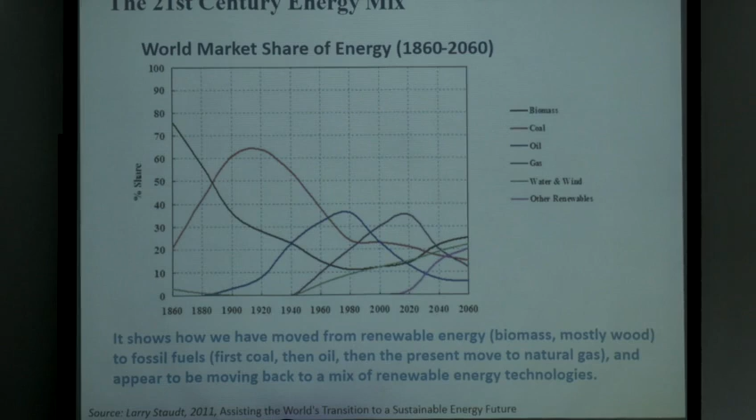But I think the more interesting part is really the projection, which will say that we have to have a mix. And the important point is that if you look at how we use biomass, coal, oil, and gas, and so on, there is always some particle technology, some granular flow, some fluidization, something there which is going to be used. So I think that we are in a very good position really to make an input in this, and if nothing else, just to understand better some of these operations and how they can affect what we are actually doing.

Now, this is the big vision, and this is the work that I'm working on at the moment, starting the end of 2016 for 5 years. And the other thing which was also very nice to see on the booklet yesterday was this micro, meso, and macro, because I think that is exactly what I'm trying to do. I'm trying to do some mainly modeling at the multi-scale side of all the story.

But of course, you realize that sometimes you have to do also some experiments, and I will try to present to you some experimental work which we have started very recently actually, so I have just some preliminary results about that. This is the vision of my work, like I said, and this is also something else which I would like to point out.

What we wanted to do and what my proposal was about, this is actually money which comes from the Research Council in the UK. I was trying to develop a user-inspired theory, and that's why I think that the application is very relevant in this situation. Now, for the ones of you who live in the UK, you know this is a buzzword. If we use user-inspired theory, this is much more likely that we are going to get funded.

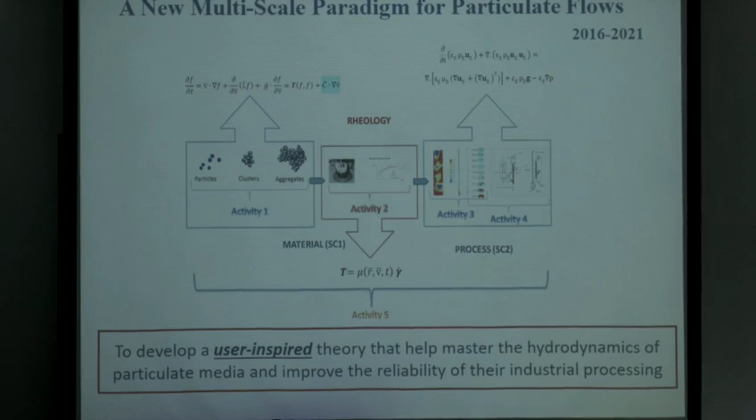Now, this is, like I said, it's a personal fellowship which aims just at looking at the micro, the macro, and the meso, of course, because we realized very soon that if we don't understand the meso scale, we are not able to do the work at the macro.

Now, this is what I listed as the deliverables, and really this is where I'm working at the moment: constitutive models and reliable measurements. And of course, there is the idea of also improving some CFD codes that we are using, and the translation, which is industry.

I don't want to preach here, but I think, speaking for my country - well I have two countries really - in one of them we really don't do enough to train the next generation. I think it's also extremely important that we don't always teach the same identical stuff. Most of my students don't know what meso is, and I think we have to start telling them that there is something in between that we need to understand.

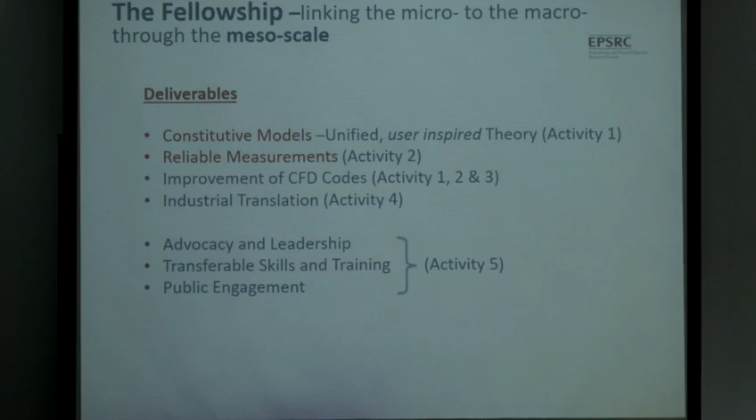Now, going back to the particle interactions, and that is what I'm going to concentrate mainly on today. In fact, I said I'm going to speak about wet particles.

We have the rapid flow regime, and I think that we have used, misused and overused the kinetic theory for this kind of flow.

We have the slow friction regime, and we know that we have been mainly modeling it through the Coulomb frictional law. However, there are so many situations where the intermediate regime develops, where you have coexistence of frictional and collisional stresses. That's where I really would like to understand better what's going on.

Honestly, I have to declare my ignorance. I don't know what is really physically happening there. I really would like to understand it a little bit better.

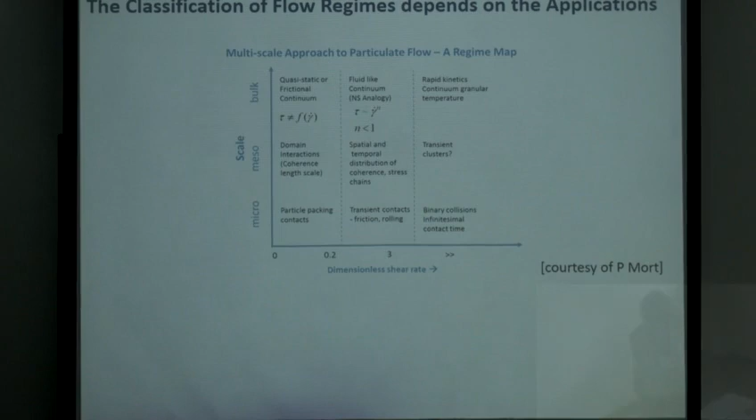This comes from Paul Mort, and I think that this diagram is extremely nice because it expresses a little bit what we know and what we don't know. And as you can see, there is not even...

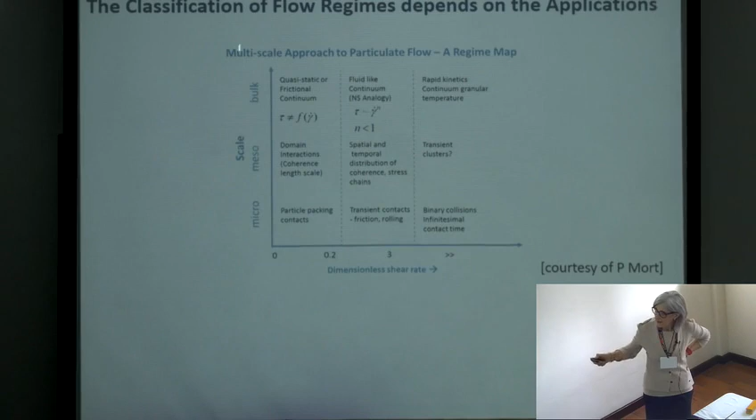There is not even numbers here, no units, nothing, because my colleagues in China are specialists about all this meso scale, and they have done excellent and good work in that area.

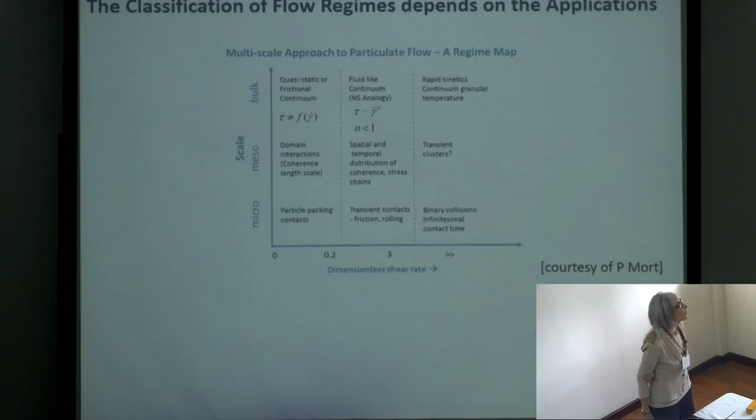And it depends on what is your observation. Meso, micro, or macro can really depend on what is your scale of observation. So I don't have anything there.

But for our system, we know in which area we are. Micro will be our particles, and meso will be just what is going on between the equipment - it's more like going from the micro to the bulk.

And the dimension is right there. We know how the stress behaves in the quasi-static regime, and we know the rapid kinetic continuum regime, but what's going on in the middle is not clear. I was convinced up to probably six months ago that there was a continuous curve there.

Just in May, I was at a very interesting workshop in China, organized by Professor Li, and I think that probably over there it's not a continuous link. There might be anything there.

It depends which effects take over. There are different effects playing, and it depends what takes over. So it depends also on the situation, what our flow conditions are, and so on.

And of course, we need to understand these bulk properties. Now, what do we know about the in-between? So meso is in-between - what do we know about in-between?

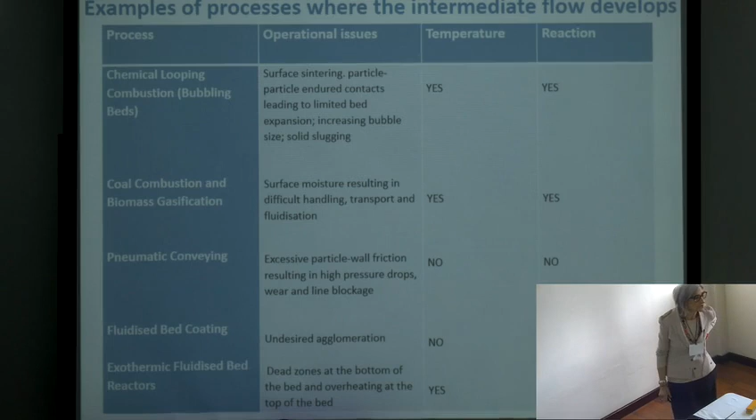We have chemical looping combustion, and for the people doing carbon capture, they know there is a lot of work going on in that area. There is coal combustion, biomass gasification, conveying, fluidized beds, and so on.

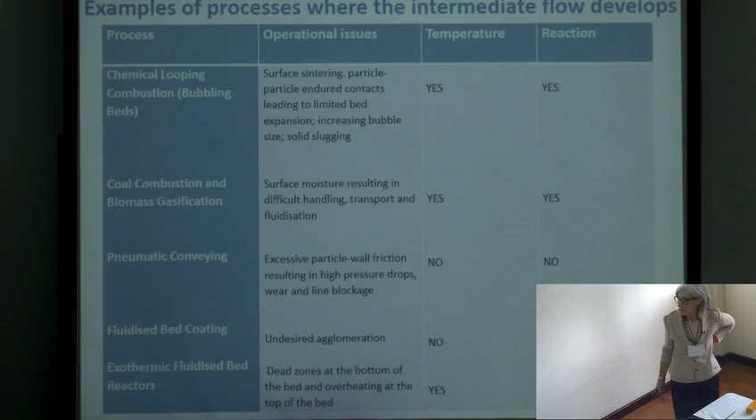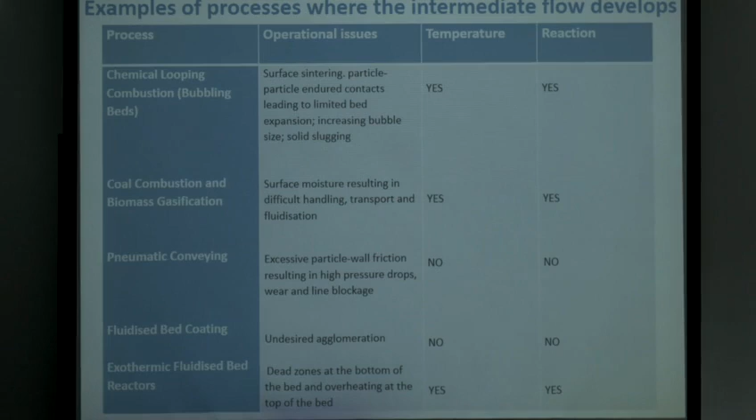Another thing I'd like to point out now, because I'm going to touch upon this later - let's also not forget that it's not just hydrodynamics. As you said yesterday, at some point we have to start thinking about the real situation and not just forget that it's only hydrodynamics. We have chemical reactions, we have heat transfer, so we have to account for that. That's why I was trying to look at this situation.

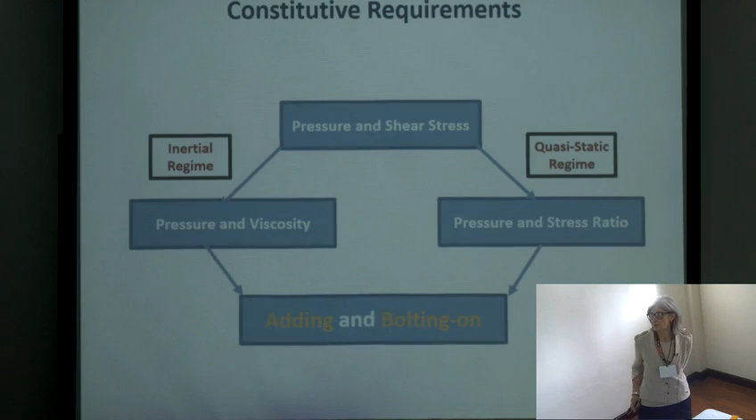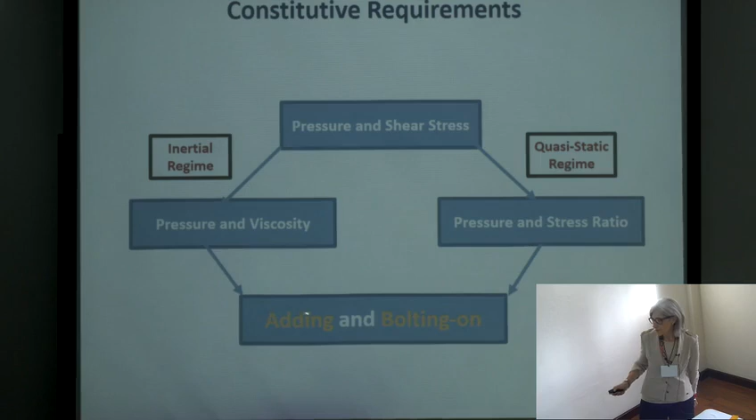Now, what are the constitutive requirements? If I want to develop constitutive equations, what are the constitutive requirements that I need to take care of? We start from here - we have the inertial regime, we have the quasi-static regime, and usually we look for the pressure and viscosity in the inertial regime, and the pressure and stress ratio in the quasi-static regime. I think that what we are doing here is, since I have an hour, a bit of a philosophical point, and I'll try to do a little bit of philosophy as well.

Yes, it's a philosophical point for me, and actually I don't have an answer, and I would like really that we discuss a little bit about this later, because this is an important point for me.

We do a lot of adding and what I call bolting on. Now, what do I mean by that? Adding, we know what it is. I'll show you some results. We have frictional stresses, we have kinetic stresses, one plus the other one, and that's the total stress.

So we add them. And the first thing that bothers me a lot is this on and off. Because if I have the on and off, I'm not able to do the intermediate regime. So that's the first thing that bothers me.

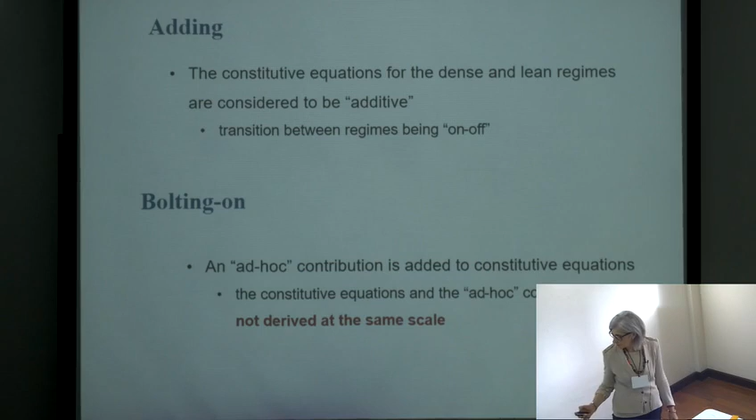The second thing is the bolting on. Now, look at the friction that we add. What do I mean by bolting on? I think the next one will explain better what I mean by bolting on.

This is a very used way of modeling granular materials. So there is an area where the flow is dilute, another one where it's more dense. And what we do, we add the

kinetic contribution to the stress with the Coulomb expression, right? I have a problem here, because we develop the stress in the kinetic theory in a very rigorous way by following the kinetic theory of gases.

And we do averaging integrals and this and that, and we get to the stress, right? Very complicated expression. And then at that point, we are not happy about what we have done. We don't predict what we want to predict. So what do? We bolt on another thing, which is at another scale.

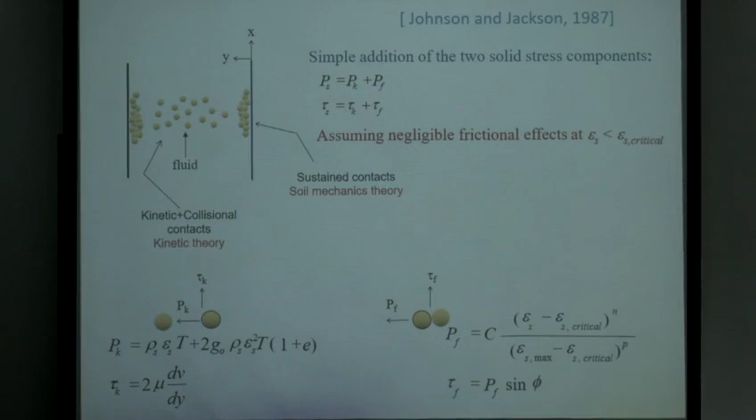So this one has not been developed at the same scale as this. So this bolting on, it might be fine, and if it predicts what I want to predict, of course, the models tell us what we want them to tell us. But the problem is that, systematically and philosophically, this makes me uneasy.

So this is the first point that I said, and we are doing a lot of adding and bolting on here, adding the two terms and bolting on another thing.

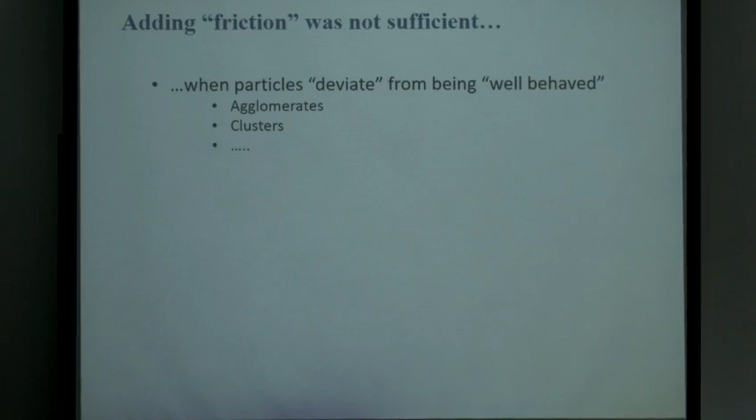However, we soon realized that friction is not sufficient. And in fact, agglomerates - and people, in dense situations, sometimes call them streamers. You call them as you want, it's semantic at the end. But clearly, you cannot predict agglomerates. And if this happens, you start to have problems.

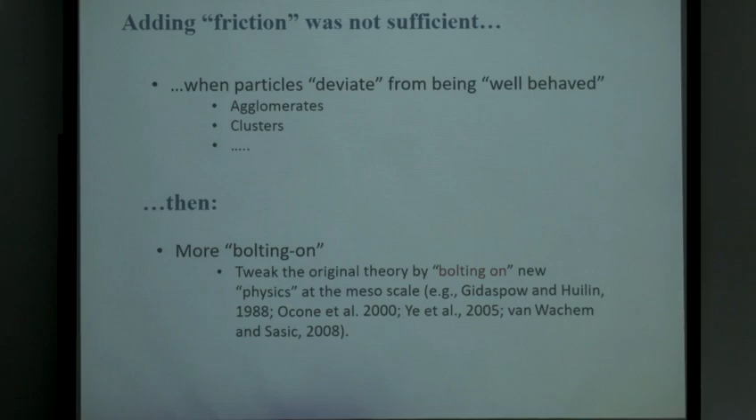And then we do a little bit more bolting on. And of course, I'm one of the people very much responsible for doing that bolting on. I did a lot of bolting on in my thesis. I continued even when I finished with the work that I'll show you here. This is what we did.

One of my first works in cohesion. Now, I call this cohesion. It can be anything which is actually happening between two particles. And what we did is just we tried to have this pressure-like term, which really very much relies on the pseudo temperature,

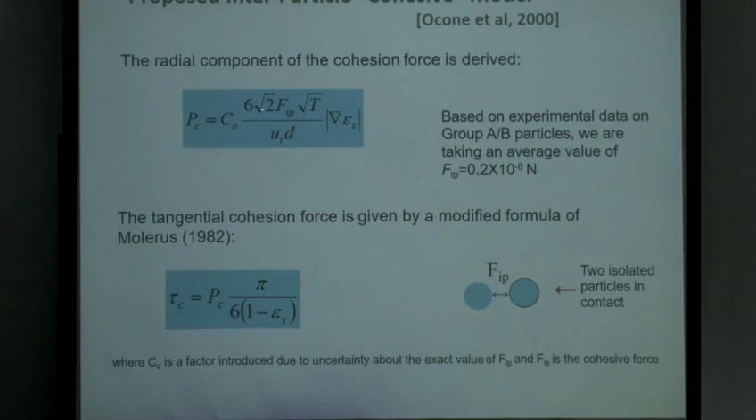or I'm so old that I still call it pseudo temperature, see? Granular temperature. Right, so this is the granular temperature, and this was the interesting thing.

And there was one of the talks yesterday, I think, where there was the gradient of volume fraction. And this is a counter-diffusive term. In other words, we made the hypothesis that when particles get together, there is more chance that other particles are trapped into that.

And that's why that term gives the possibility to have this collection of particles sticking together. And what makes them sticking together is that force there, which, of course, we had to find in the books. We didn't have anything to compare with.

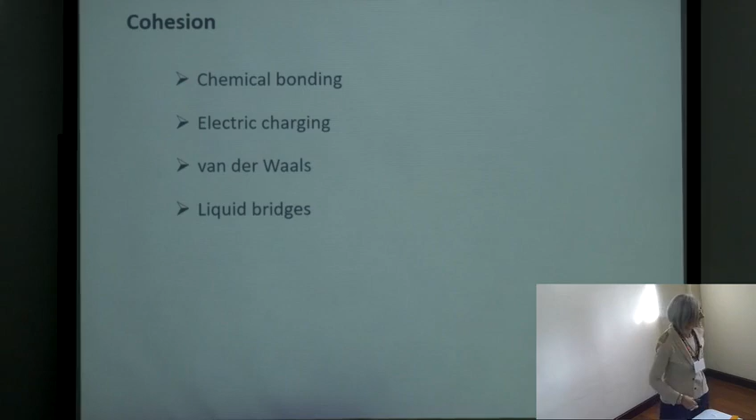So what I call cohesion—again, somebody now will tell me, probably it's adhesion, not cohesion, but particles of the same material should be cohesion, at the wall probably it's adhesion—but anyway, let me say these are the interparticle forces that are there.

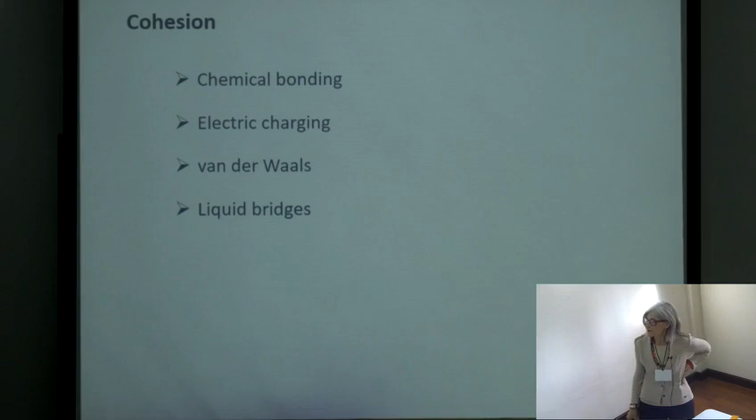So we can have chemical bonding, electric charging—and you saw the presentation yesterday—van der Waals forces and liquid bridges. Another thing I would like us to think about: we are spanning seven orders of magnitude with our particles. So it's not so much of a mystery that things can change drastically, because the physics changes across seven orders of magnitude.

So what I'm going to look very much about is liquid bridges, and I was hoping that Christine was here, because I think she has a very nice complementary work to present on this.

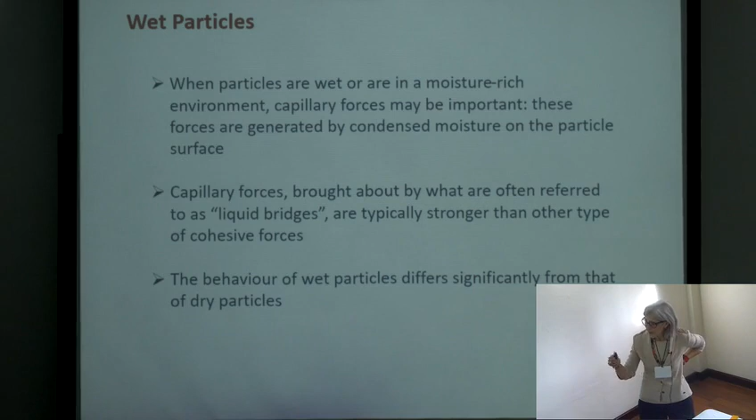So I'm going to concentrate on wet particles, and we consider particles with a little bit of moisture. These capillary forces start to become important, and these liquid bridges start to develop.

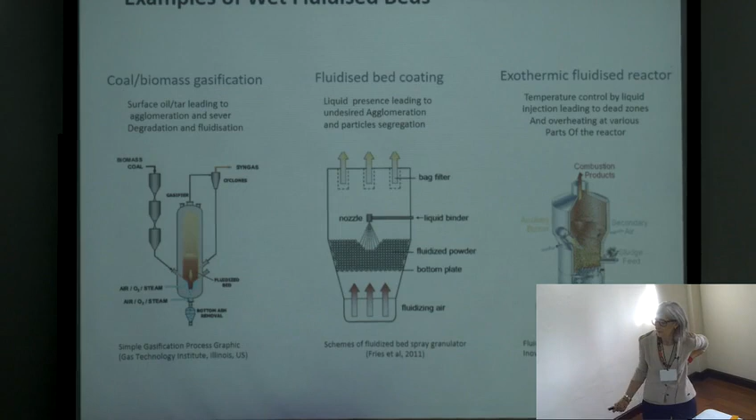Let me go back to situations where these liquid bridges are—you can find them in coal biomass gasification, and I'll show some examples of that, coating, fluidized beds, and so on. So this is our hypothesis.

And then you go to another situation, which is this one, when you have the quasi-static flow and you have really these particles with enduring contacts. But you can have this situation here when you have these liquid bridges, and here you have this dense intermediate flow.

Now, what we do—again, don't tell me this is again bolting on, this adding, yes it is, just to prevent any criticism here—so what we are doing is we are just trying to input another term into our particle-particle interactions.

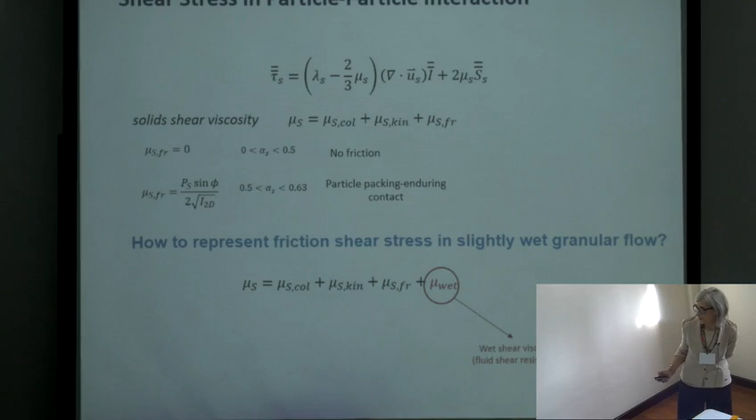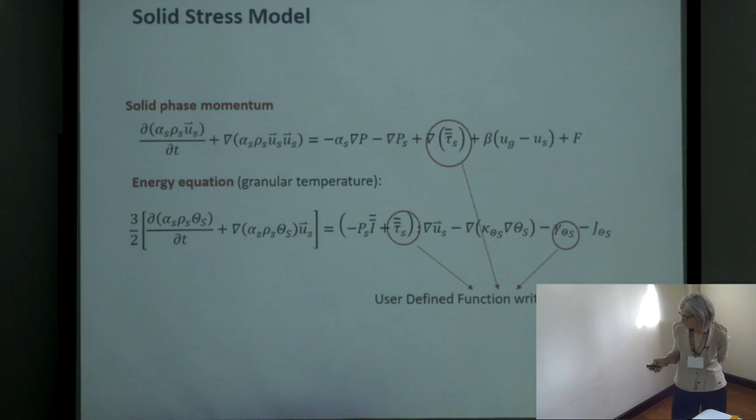And this is the wet shear viscosity, and we use the two-fluid model, of course, and what we are going to modify are the terms here where you see the stress tensor, as well as the term which takes into consideration the dissipation of granular energy. So these are the two modifications that we do in our modeling—nothing new, it's not us, but nothing new about these terms.

You can find them in very well published data. So you have to go back and look carefully at the liquid bridges and write down the force that you have at the single particle level.

Of course, there is the interparticle approach. There is a lot of work done in Sheffield. Adams did a lot of work on this, and you can also look at kinetics—the liquid bridge can move, the amount of liquid can evaporate, and so on. We try to make it simple, so the liquid stays there and doesn't evaporate, and we made sure this was the case when we did experiments using not water, but silicone oil.

So we came out with... why do I do this? Because I'm stupid. Oh, this is a characteristic that runs in the family—my mom used to ask questions and answer them herself. So I'm the same, I ask the question and answer it. I don't know if I want to be recorded, but recorded, that's it.

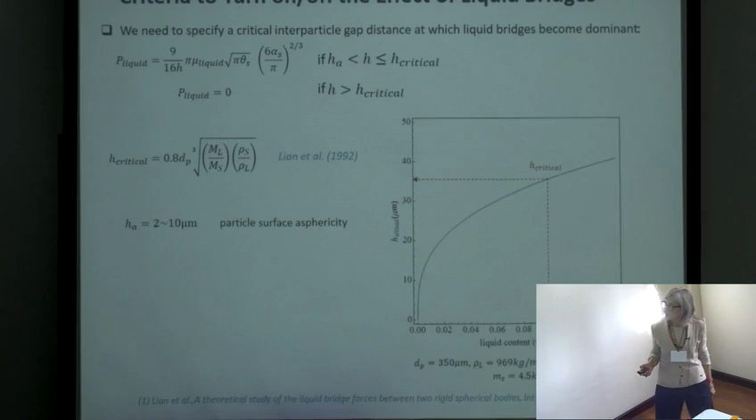Anyway, this is the normal stress, and this is the equivalent viscosity. There is also this lubrication coefficient that we look at from the paper by Adams and co-workers, and that's what we have. The other thing we had to be aware of is that this was again on and off, which we didn't like very much, but it has to be there if we want to do something at this level.

There is a critical distance between the particles over which you don't have the liquid bridge as such—you just have the particles surrounded by liquid. This HA here has to do with the asperity, so it's a way to compare the liquid bridges with the asperities on the particles.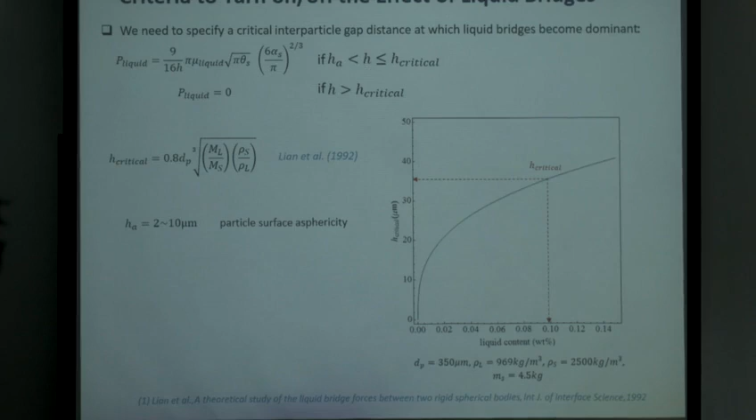What one can see in terms of liquid content depends on the liquid—what are the values of H. This is a parameter we have to change when we have different amounts of liquid in our system. The same situation applies in terms of solid volume fraction, where you can see when this term starts to have an effect.

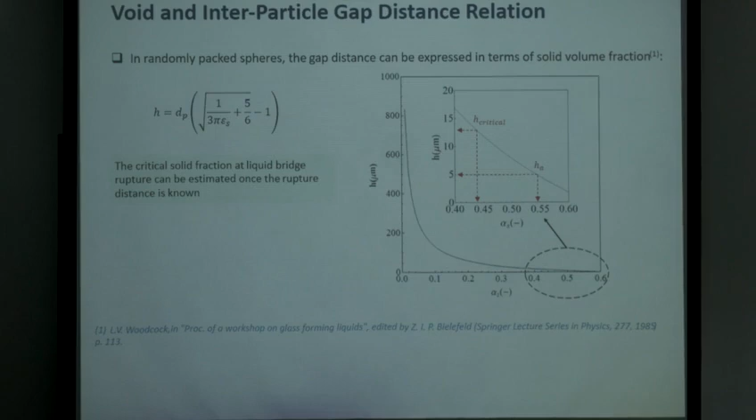The other thing, if we want to look at the dissipation of energy, we have to look at the coefficient of restitution for wet particles, and again we have to modify it, taking into consideration the Stokes number. There is a critical Stokes number here, linked to what we've seen before, and you do this calculation. You complicate the model a little bit, then you input it into the model.

That is some of the results we have. This is clearly an additive effect—I put 'additive' there so nobody complains I'm cheating. You can see that here we also have friction; even friction jumps immediately, on and off, at very high concentration. This one is slightly better because it goes down a bit, but what we would really like is a more continuous effect, which we don't have at this point.

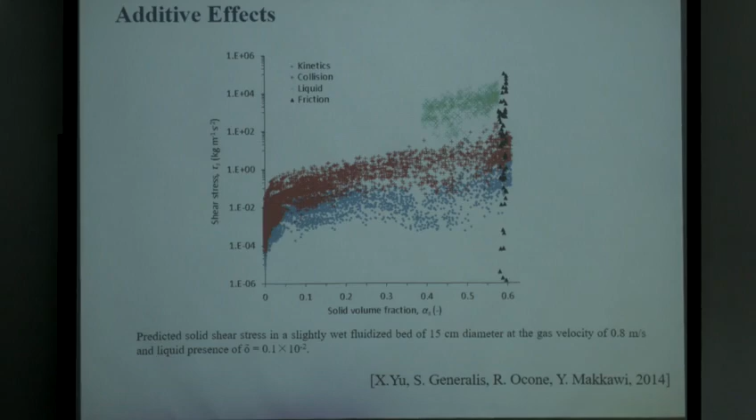For sake of time I won't present those results, but there is very good work by Tardos, done in 1D, showing a different kind of stress that is more continuous. Not long ago we generalized it to 3D, and we saw that you can predict these interactions more continuously. It's not liquid bridges, but cohesion that he speaks about, and this is what we get in terms of energy dissipation and granular temperature.

So you can do everything you like, and you can compare with the dry bed and see that there are some differences when you have the wet bed.

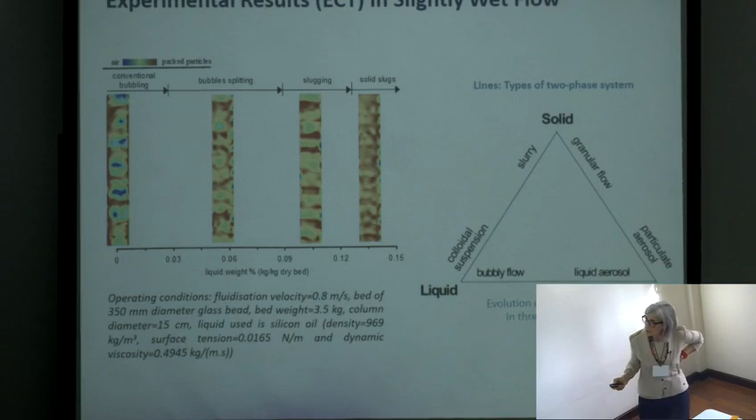Now these are just a snapshot of some of our experiments. We did experiments on a little bed with electrical capacitance tomography, and like I said before, we put some silicone oil in it. You can see that very little amount of liquid can really change dramatically the situation.

So we go from here, where it's essentially dry, and then as we have more liquid, you start to have this kind of behavior, which of course is for the operating conditions that you see here. But you can repeat this with any other kind of system, and that's what you see in the experimental work.

And again, this is what you see in the experimental work. So you can see that for various amounts of liquid, you have different behavior of the bed, which is actually very nicely described also from the experimental fluidized bed pressure drop that we can measure.

The model does well, doesn't do anything here because, of course, we are changing regime. You cannot apply that kind of theory anymore. So if we remember when the kinetic theory and all the modifications can be used, it's okay, we can use it.

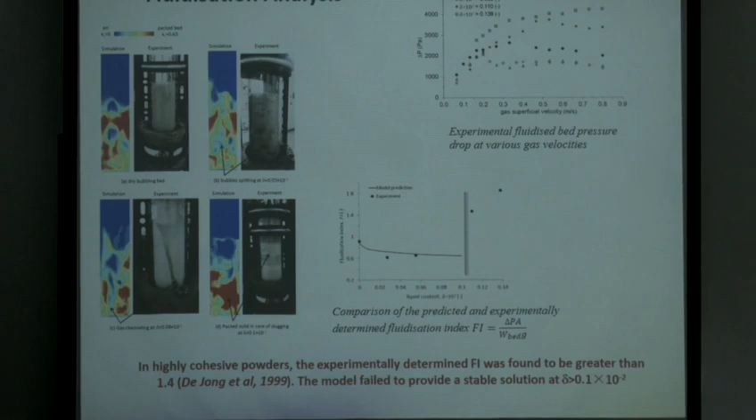But I think we have to be cautious, because I have reviewed papers, and also, I'm afraid to say, being external examiner on theses, where you have very dense regions and people apply the kinetic theory. And that's not acceptable. But people get excited, and many still use it in this way.

I want to switch now a little bit and show you another system that, again because of the energy focus, we have been looking at in detail: biomass pyrolysis. The reason I want to do this is because now I would like to challenge myself, not just with the hydrodynamics, but also with the chemical reaction.

And even more importantly, there are more than two phases. If you really want to do the system correctly, there is more than one solid there.

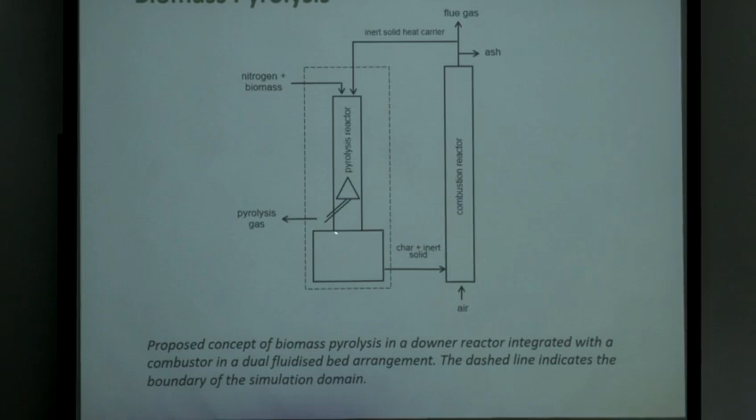So we were lucky to have experimental data from Canada, from ICFAR, from my friend Franco Berruti in ICFAR in London, Ontario. This is the pyrolysis reactor, and it had a very nice new way of separating within the reactor, inserting this conical separator here. This is actually a downer, not a fluidized bed, and this is what we tried to model.

So we have a couple of papers published with them—they provided us with the data, and we did the modeling. How did we do the modeling? Well, we used again the two-fluid model, and there are at least two papers published on this. I don't want to go into all the details, but if people want to speak about this later, I can provide the paper so we can go through that.

But the important point here is that we have gas phase, sand phase, and biomass phase. Of course, we are assuming the biomass is all one size. But nevertheless, we have two solid phases, so we have to have another equation here for the momentum, and we also have to have the granular temperature, which takes into consideration the dissipation because of the two phases. More importantly, there are reactions here that we have to consider.

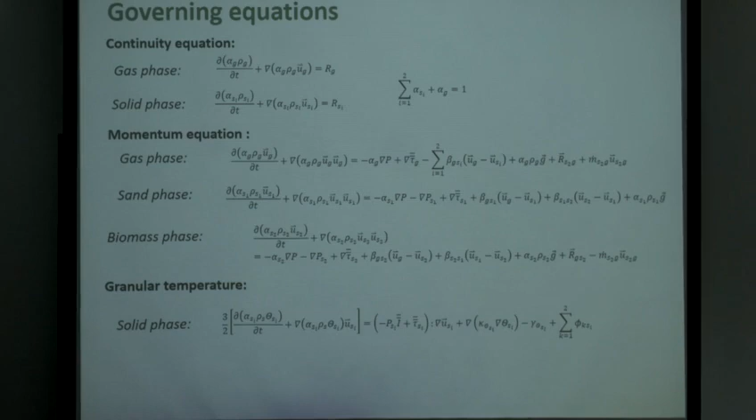What we have to supply—there are many more closure equations that you need, of course. So we have to do the gas species conservation, and the energy balance equation on the three phases. And when I say energy, I mean energy—the temperature is changing. So we have to do the heat exchange between the gas and solid phase: heat transfer, Nusselt numbers.

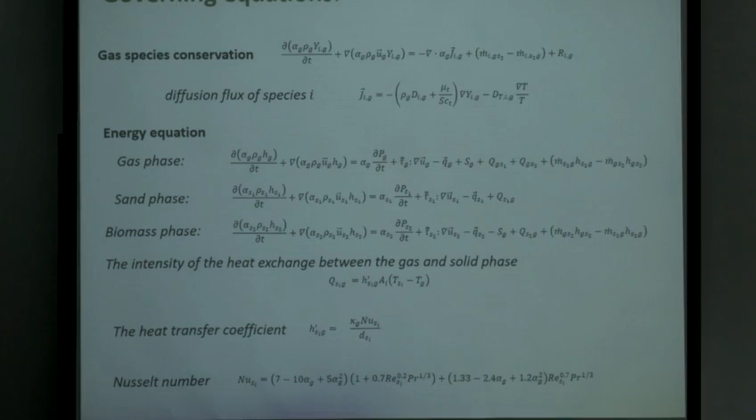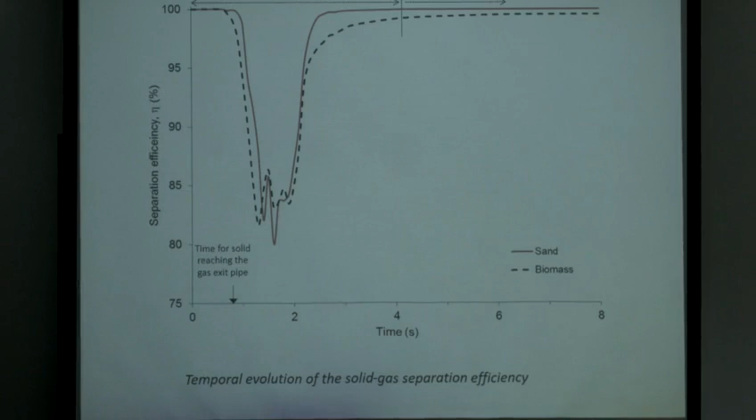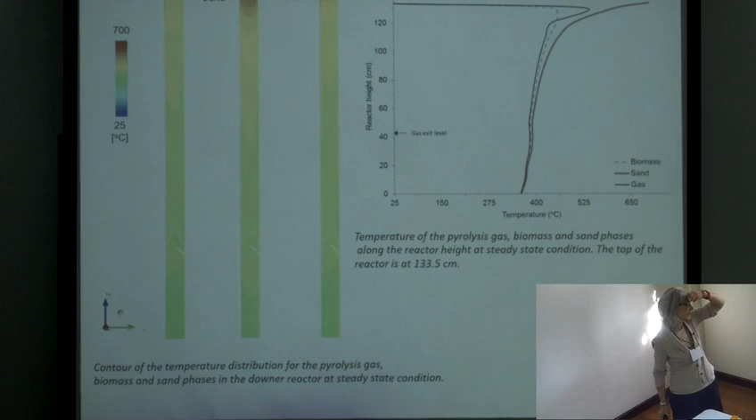The other thing that we are able to do is look at the biomass, the sand, and the gas - for instance, the temperature and how it evolves along the equipment. There are many things that you can do; I just show you some of the results which I thought personally were more interesting.

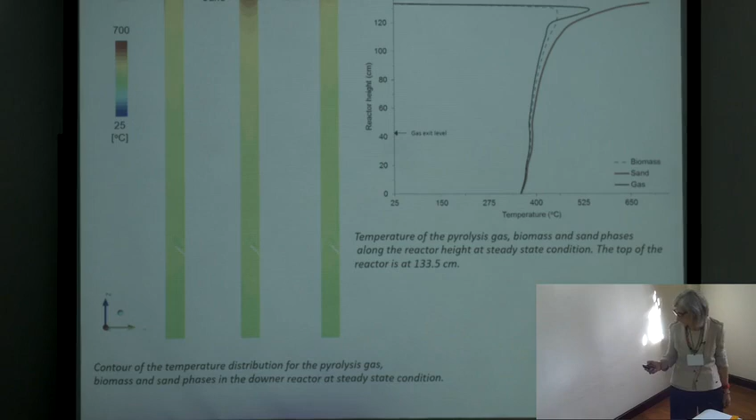See, it's really very much like what happens in cracking - everything happens at the inlet, and you can forget about anything else. But of course, if you have a separator, you cannot forget about that because you have something else to worry about. You can see how the sand is going to be captured, how the biomass is going to be captured, and the devolatilization rate of the system.

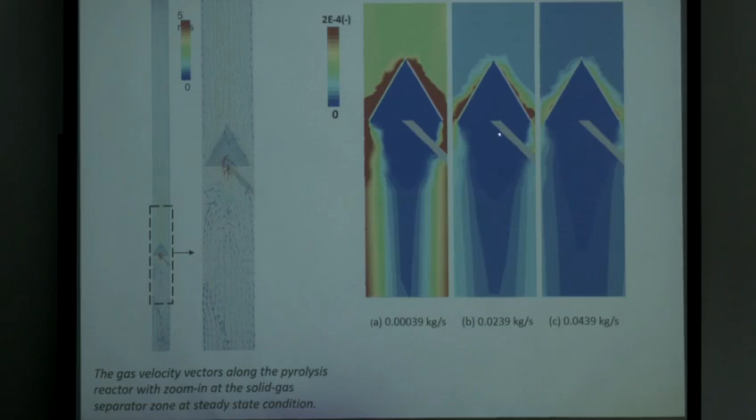Here you can see how the gas velocity is going to distribute around the conical section, and you can see that for different amounts of sand, you have this different capture.

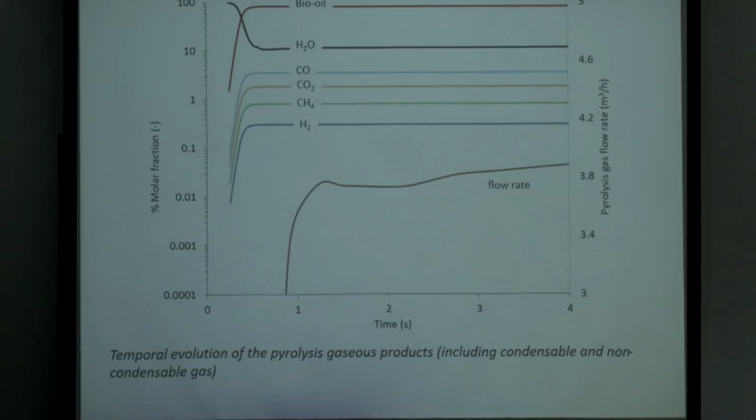But I think the most interesting thing is that if you look at this, you can actually look at the temporal evolution of bio-oil, water, and the components you put into the system, and this is against the flow rate. So I think we have what we expect, let's say. But of course, we have to be able to see if this is a qualitative feature, if we are able to predict what you observe in practice with numbers.

Yesterday we were discussing, I think it was at lunch, a little bit about the fact that we want to look at the energy mix, we want to look at the application of these systems - but is this something we want to do because we want to just predict what we already observe, or because we want to use it for the future in terms of design and doing something?

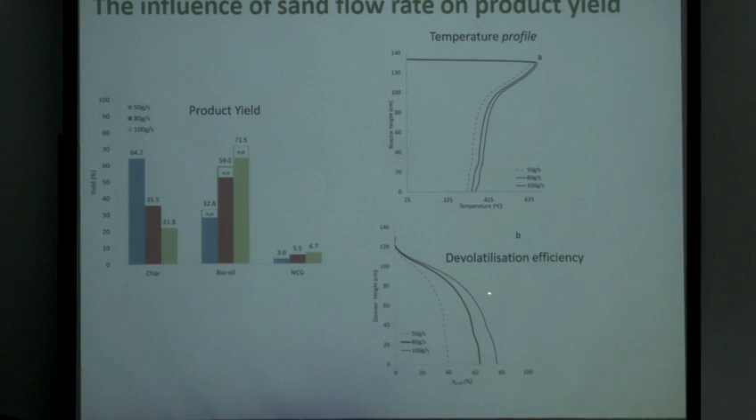This is what I mean here when I say that with different flow rates of sand, you can have different temperature profiles and devolatilization efficiency. The same applies if you change the size of the particles - it also has an influence, and changes the yield. Again, I'm not saying we have to trust these exact values, but if you want to look at the trend, I think in practice you can start to see what the model can tell you.

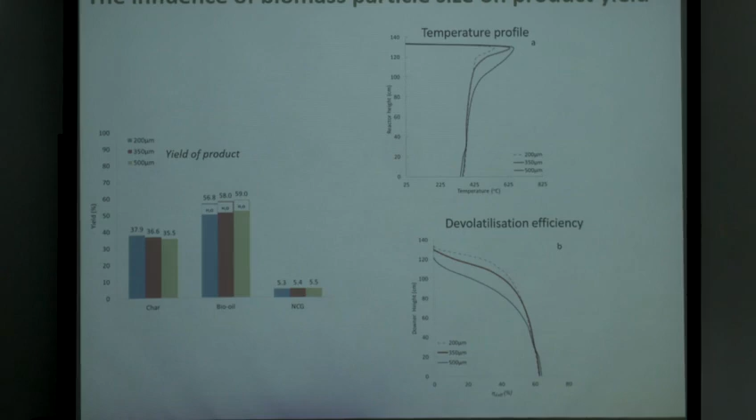Now, to summarize that kind of work, the product yield depends on the flow rate, and we know that. But the important point is that if we really want more bio-oil, for instance, we know which way we could go, and the same if we change the particle size, we can know how the system responds.

So in pyrolysis, there are applications where you want more bio-oil, and slow pyrolysis where you want more biochar. If the model is able to tell you in which direction you should go, that could be a very good thing for us.

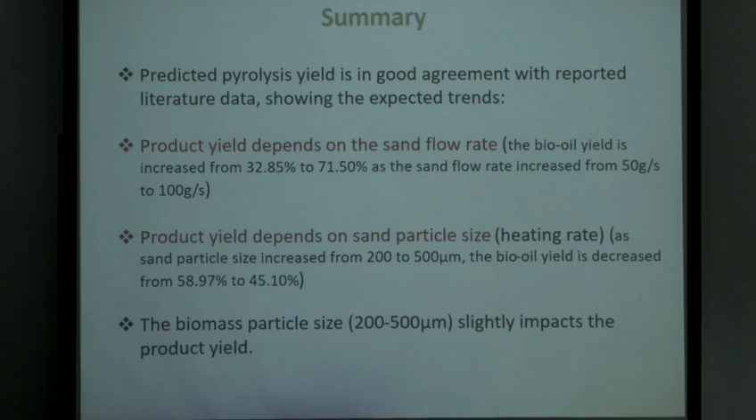Now, another application - there's somebody from BP in the audience, so fluid catalytic cracking. Let's go back to the basics. This is actually work, interesting work, that I did with my colleagues in Brazil, sponsored by Petrobras. What I like about this work is that I was able to consider very complicated chemical reactions and have the system working fine.

And this is really complicated - not just in terms of the equations you have to solve, but because you don't know exactly what the kinetics of each single reaction is. In my previous life, last century, I did a lot of work in lumping kinetics. For people working in the petrochemical industry, lumping kinetics is really the only way to tackle very complicated kinetic reactions with a large number of reactions.

You have one lump, two lumps, three lumps, four lumps, and so on. I remember my late supervisor, when I was still an undergrad, used to tell me, there are only three numbers: one, two, and infinity. So if you have more than two, don't bother with summations - they're too complicated, do an integral.

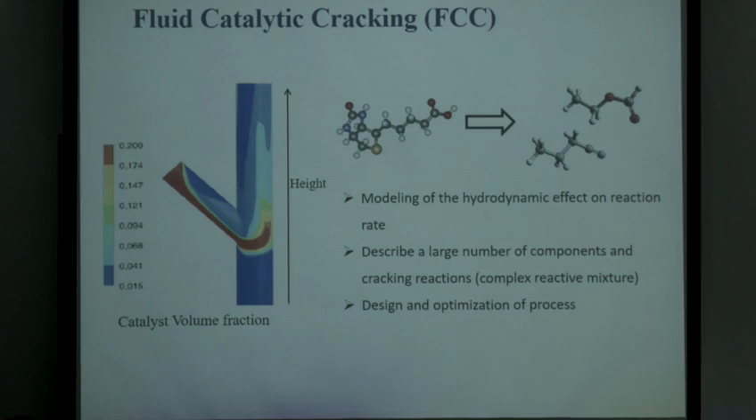I want to show you how difficult this problem actually is. This is the system we are trying to model - just the injector in a riser, and like I said, everything happens here. That's the interesting situation for the cracking, and this is what we were looking at.

We had the feedstock, which was given to us - this is any property, but actually we had the boiling point here, though you could also use carbon number, which is related. This is the kernel, the label for the reaction. Then for the product, you generally want middle distillate, so you want to shift this and have a much narrower distribution around the area where you'd like to have it.

I'm not going to go through all of what we have to do - it's a very cumbersome way of manipulating things mathematically. There's a lot of mathematics there, this equation here, but what you can do is come out with an expression.

I have to say I'm extremely happy to present this in Mexico, because one of the biggest contributions in this area - probably the biggest contribution - is from the Mexican Institute for Petroleum. Ancheyta, I think, is the person who has done a lot of work in this area, because they extensively use this, since in Mexico you have heavy oil which needs to be cracked.

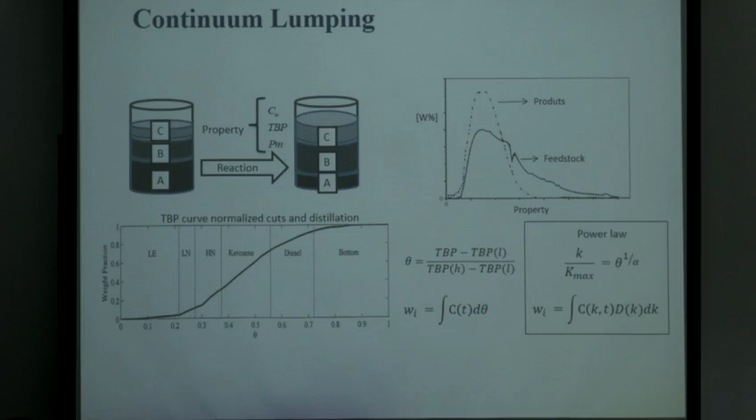So this is the way you have an evolution of the weight, or of the size, of the components just through an integral. And this is what the reaction looks like.

And this is the tricky part. Essentially what you are saying is that the balance on a single component - which isn't even a single boiling point, but components with boiling point between P and P plus delta P - is given by what is being cracked and what is being produced. It's a difficult way to do it, because while it's nice to write down, numerically you know what's going on here, and you want to start here.

So you have to go back and back and back and back. And then this is the distribution that we use, which again comes from Mexico. The important thing is that it was very difficult to implement, because at each single step you have to go out, calculate all the reactions with the integral, see if it converges, go back and try again, and it really takes a huge amount of time.

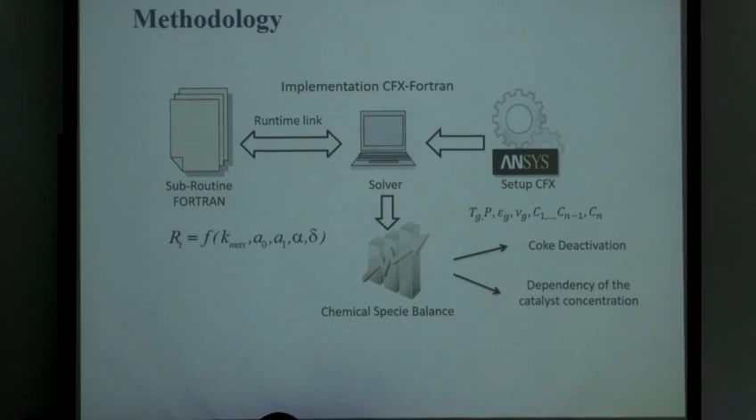It was done in Campinas, where they have a very nice big cluster where we could do the calculations remotely. Actually, I had the students in Edinburgh, but we couldn't manage it there. And now Ali will laugh, because we always make fun about our IT people.

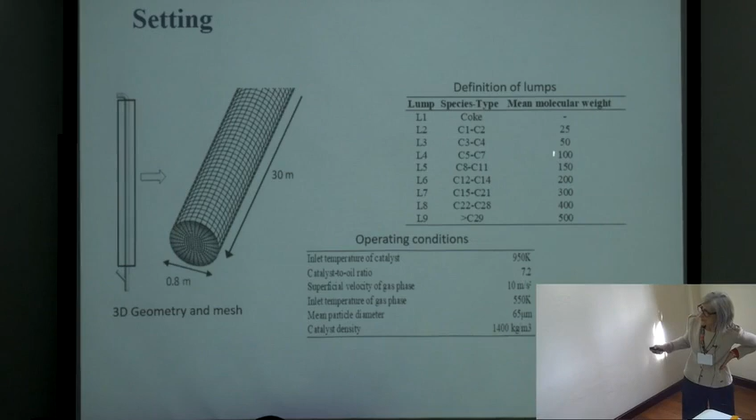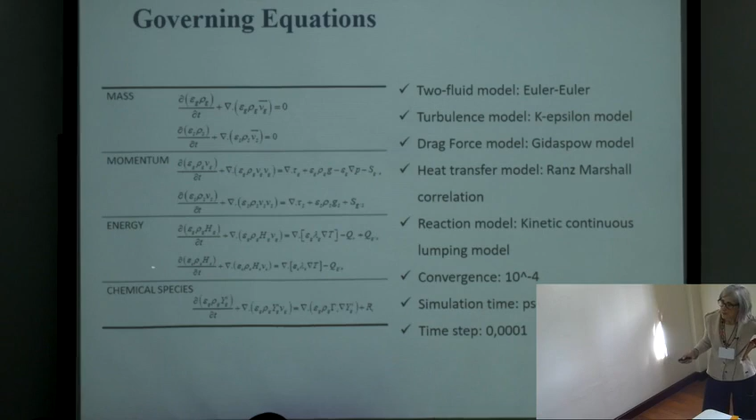So anyway, this is the way it was. We had the 3D problem here, and this is the way we define all the lumps, so we know what is in each, and these are the conditions. The interesting thing is that these are the governing equations that we use, and we use very much the two-fluid model.

But again, the very difficult part was now the reactions to be used in that. The pyrolysis was easy, very easy compared to this.

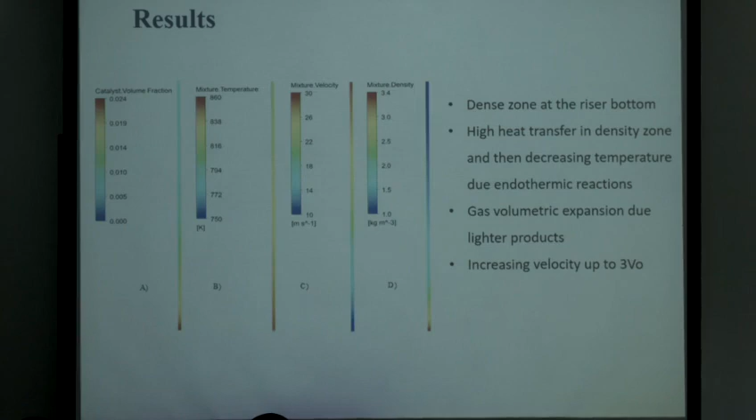And we had some results. So, dense zone and everything that you can expect when you have FCC, fluid catalytic cracking. So these are some of the results, and then of course, what you can see is that you have the cracking.

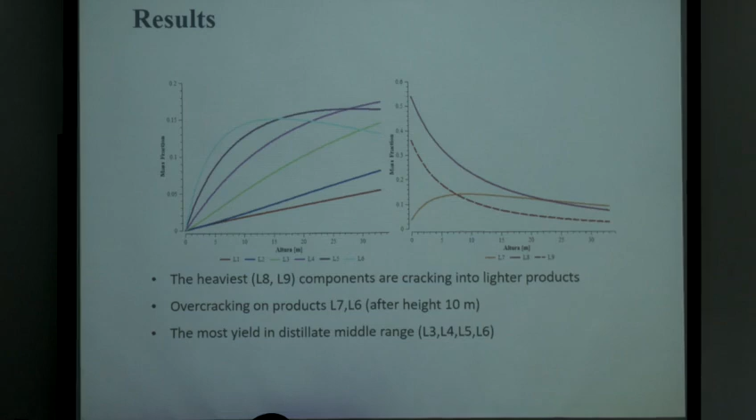However, although we were happy because we were predicting again the middle distillate very nicely, there are huge problems with the coke. So the coke gives really huge problems there, and that is something that, well, we had a project, but then Petrobras was not able to support it anymore, and you know what happened. The coke really is what gives you the big problem there.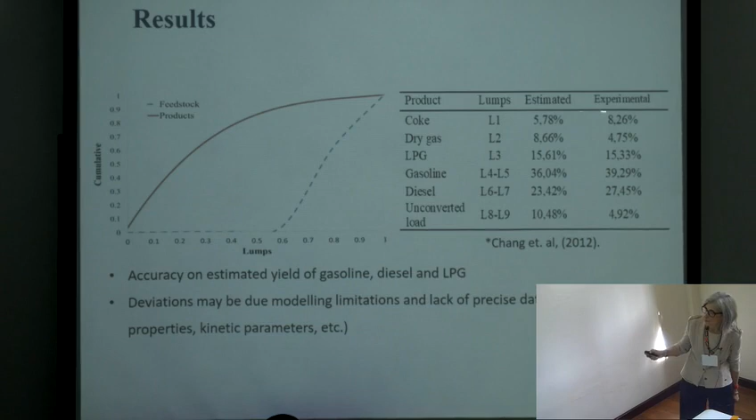Again, these are some of the results, and these are the experiments from Petrobras, and these are what we estimated. There is some problem here, but I think it all goes back to here. But I think that it's really the middle distillate that we were much more interested in, like in all this situation. It's the product that you are looking for.

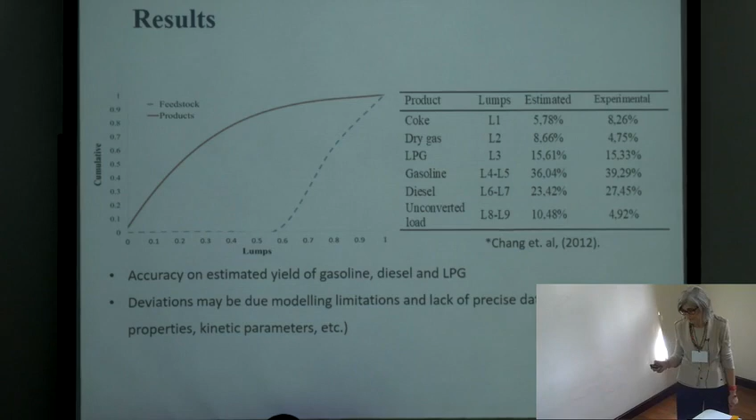So I'm trying to make some, well, it's not conclusions yet. I have still a little bit of things to show you, which is more work in progress. But these are some considerations so far.

The kinetic theory, I don't want to abandon that completely. I don't want to throw it out of the window, but I'm more and more skeptical to use it. Essentially because the intermediate regime, which I like very much to understand, cannot be predicted, cannot be described well with the kinetic theory. We extended this Tardos model, which I didn't show today, and it's slightly better, but still it's bolt-on.

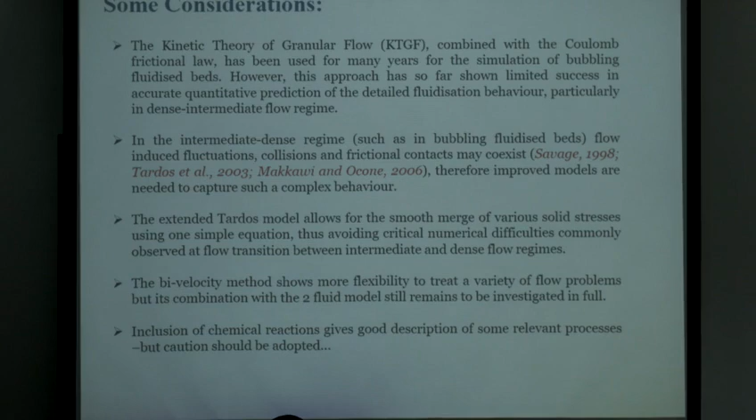And we are trying something else with the bi-velocity method, which probably has a little bit more flexibility. But I think that the most important thing is that we have to start to worry also about chemical reactions that we have not done so far. And the bolting on, of course, has not been resolved, so I have to solve this problem.

Now, let me go back a little bit to the kinetic theory, because I want to do a bit of provoking talk now. We know this, I don't need to go through this. There are inconsistencies there, right?

So particles cool down, scales, and so on. And you know, I always think, well, geese know that the drag changes if you fly alone or you fly together, right? And we are still not agreeable about what's going on with the drag in particle systems. So this is definitely something.

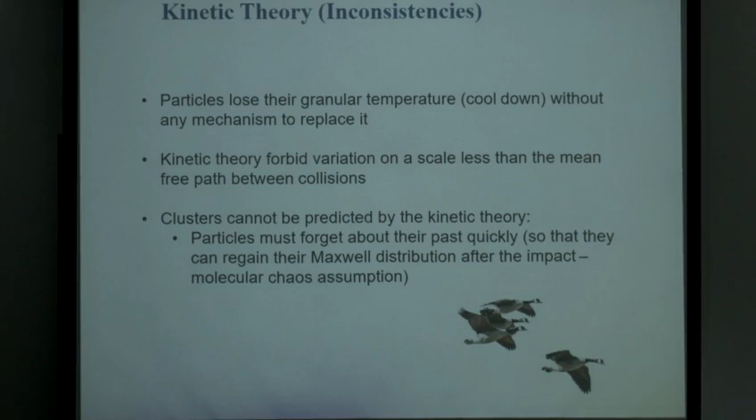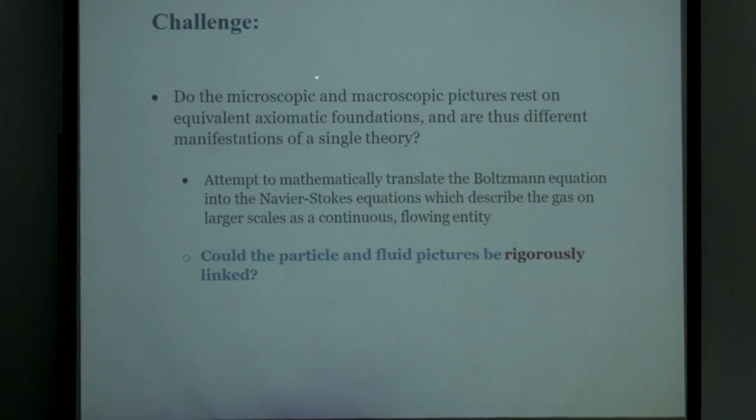Now, the challenge for me would be really to have a more consistent approach to make sure that we can have two pictures, one at the microscopic and one at the macroscopic level, which are simply based on the same foundation. This is why it's not that I don't believe in the kinetic theory, but I think we have to restart from scratch now and start to develop new constitutive equations. So my question is really, can we do this?

And I think that what we need is to know the fabric. We need to understand in between, at that mesoscale, what's going on there. And let me quickly say, I'm very much advocating that we should do more rheometry, because sometimes we do viscometry without caring too much about the fact that we can span everywhere here with our systems.

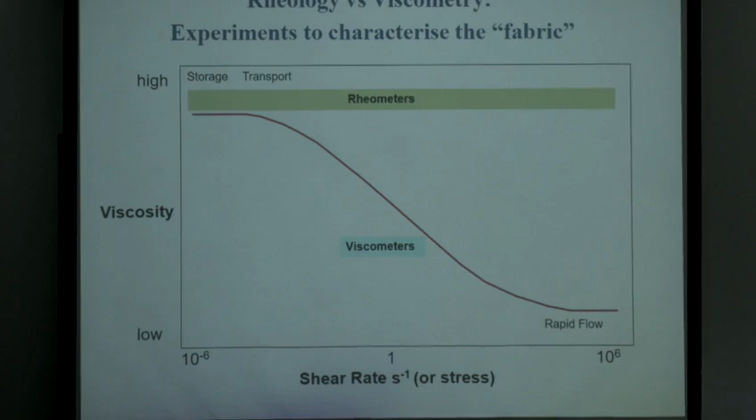And what I mean is that these very nice results from France, from Nancy, show that if you have glass ballottini, only glass ballottini, and you are trying to do the viscometric measurements, right?

You have a straight line. This is the viscosity, and this is the shear rate. If you oscillate and do the real rheological test, you have this behavior. Glass ballottini, nothing more than that.

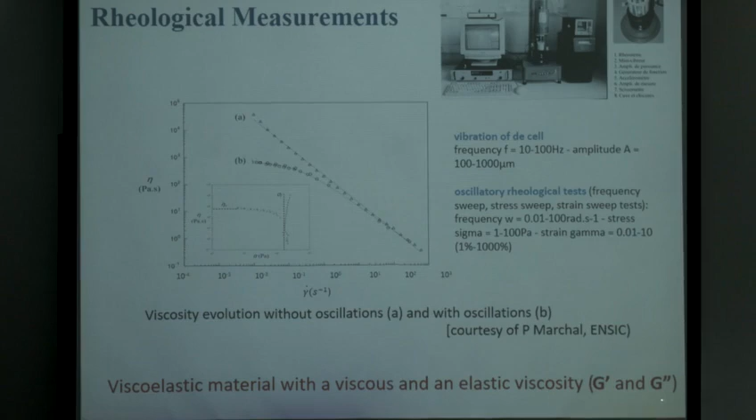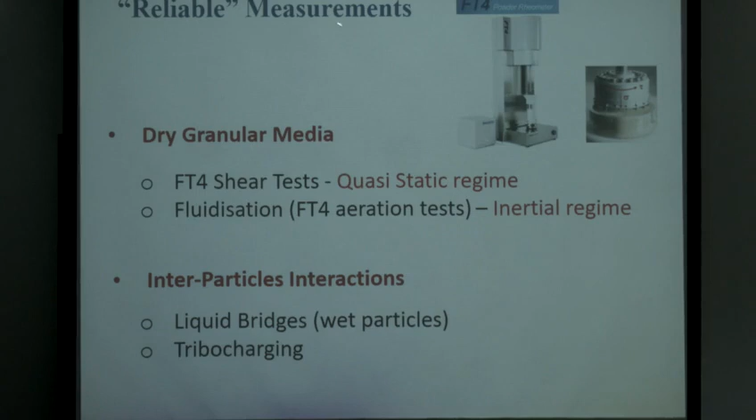It means there is something there that we need to investigate for these particles. I'm advocating that we really need to understand more about G prime and G double prime in the same way as we do for polymers. We have started to look into the reliable measurements, as you remember, this is another outcome that I have promised and have to deliver at one point.

We bought this FT4, the Freeman rheometer, a viscometer probably. But the interesting thing is that it can be used for the quasi-static regime, like a shear cell, and also for fluidization tests, because you can fluidize the cell. Now we are really trying to use this equipment to understand what the constitutive equations are, and we realize we also have to understand the quasi-static regime to make sure we can combine the two. These are the two things we are looking at right now.

I'm much more interested in these liquid bridges, and Ali is very much interested in this tribo-charging. Fingers crossed, let's see if this works.

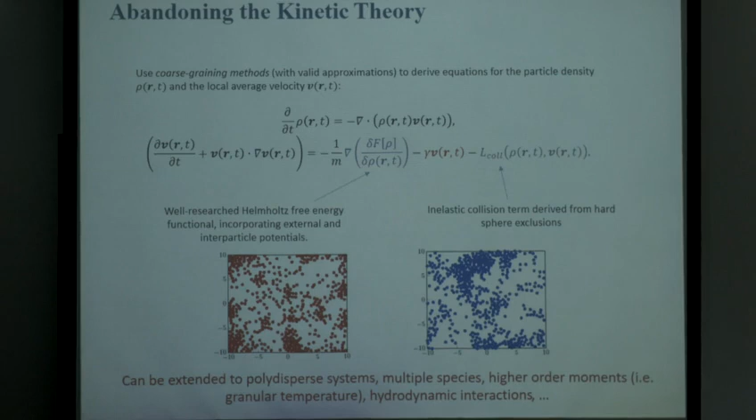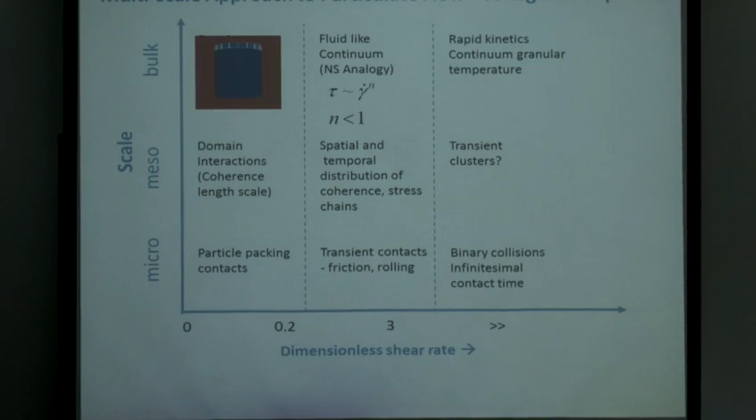So, to conclude, go back to this. What we are doing is DEM at this level. We have been doing, we are not doing at the moment, experiments at that level. We are trying to look at the experiments with that cell now at that level. We are trying to do something we believe is between, and of course we are trying to have a smooth merge.

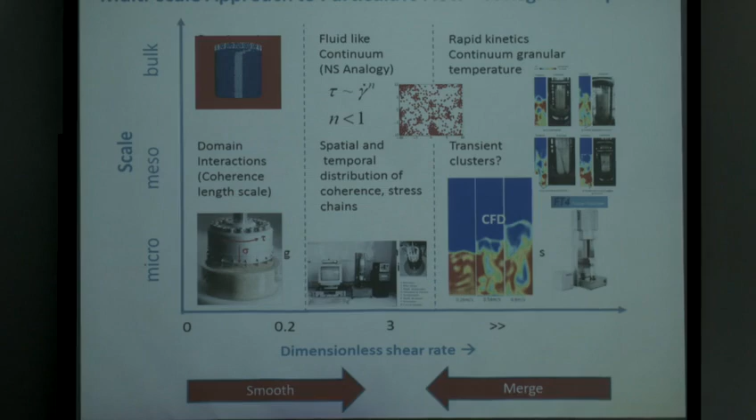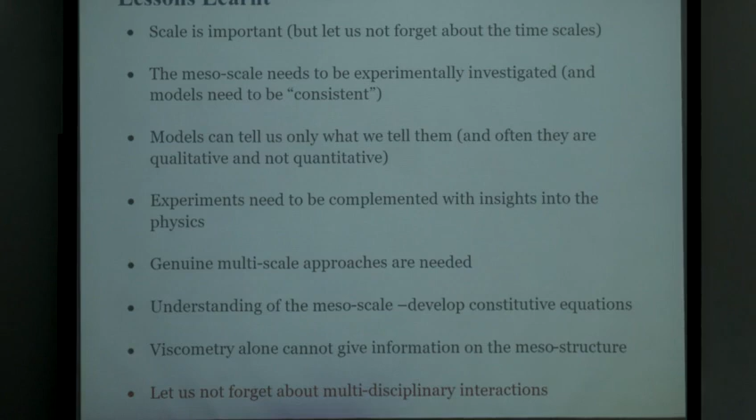I have learned that the scale is important. I have spoken only about length scale, but there is also a time scale that I completely forgot to talk about. The mesoscale is very important. Don't trust models, but I think understanding the mesoscale is really important. But more importantly, as was made yesterday again, we need more interaction: more chemistry, more mathematics, more engineering, more of everything, more philosophy probably.

And thank you very much.